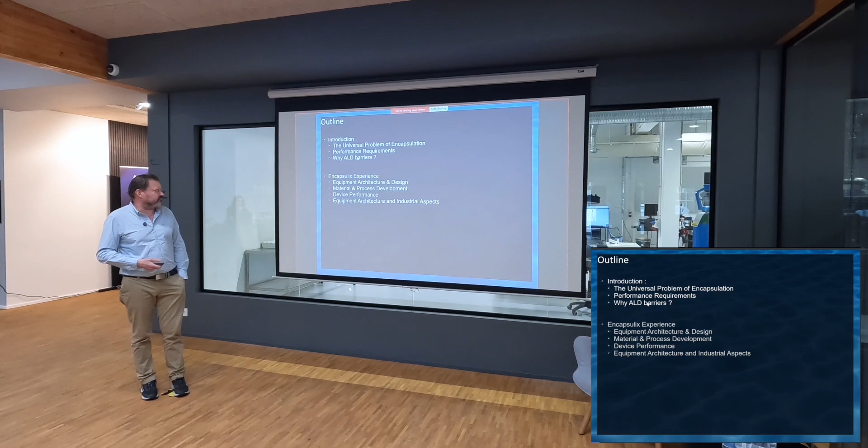Why ALD? Why we want to use ALD and not something else? And the answer to that should not be, we happen to have an ALD machine and we want to put it to good use. And then I will talk a little bit about the work we've done at Encapsulix, something about equipment architecture and design, some material and process development, how that translates to device performance to the extent that I can talk about it, and say something about equipment architecture and industrial aspects.

Okay, so as I said, when we talk about encapsulation, what do we talk about? You have devices, and devices is something to be taken in a very large sense. Products, they're fabricated, and during their lifetime, they will be exposed to chemical reactions with environmental products. And that could be as diverse as, in electronics, for example, the major thing is OLEDs. Organic light emitting devices are very sensitive for two reasons. Number one, you have these organic semiconductors, and if the molecule absorbs one water molecule, its band structure changes and it is no longer a semiconductor.

And second, if you have a display, let's say you have an OLED TV and you have 2 square millimeters that is not working, you can throw it in the garbage. If you have a photovoltaics panel and there is 0.2% that doesn't work, you could live with that. You just have a little bit less power. So OLED is a big thing. We're working with 5 different makers of OLED displays in Asia, Europe, and North America.

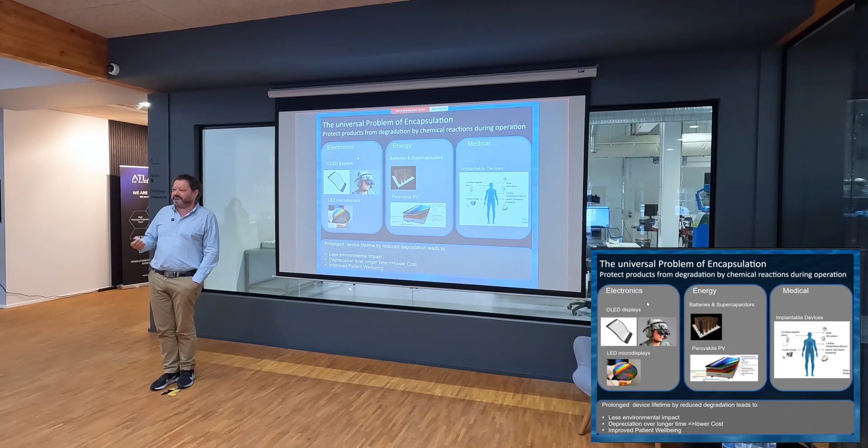And finally, if your patient has to be opened for service of the device every year or every 5 years, in terms of patient well-being, that's also highly desirable. Which brings us to: what are the barrier requirements in terms of performance? What do we want? First thing, very important, we want no pinholes, okay? And we'll come back later to discuss that subject a little bit more scientifically.

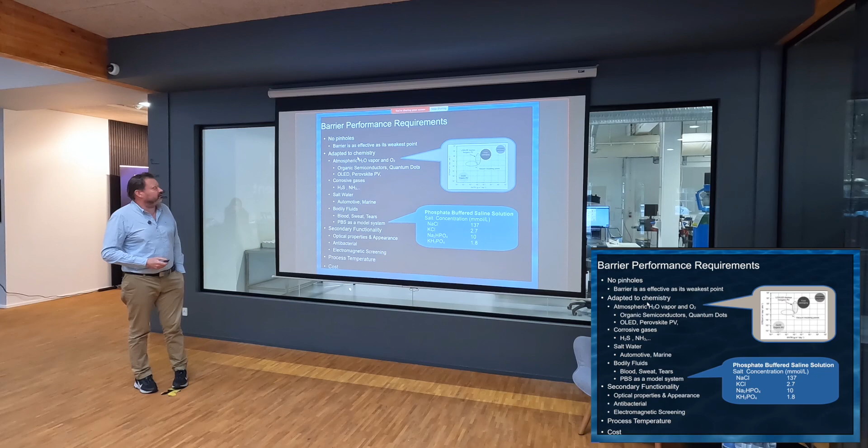And what we see in practice is that a lot of barriers are really determined by the defects. It's not so much the intrinsic properties of the material, it's the defects that determine everything. Second, it has to be adapted to the chemistry we're working with. There's a variety of relevant chemistries, depending on the application. As we talked, the organic semiconductors, the quantum dots used in OLED, perovskite, and so forth, are very sensitive to just atmospheric water vapor and oxygen.

You can have corrosive gases. For example, this is a very interesting example. When they make high-end watches, I'm talking about watches that are up to €1 million a piece, when they do the leather of the watch band, they use chemicals for this. And I've heard that there is outgassing over time of sulfur-containing components from the leather that attacks the metal of the watch. It is not my personal experience, unfortunately.

But I understand that if you buy a €500,000 watch and black spots appear after a year, you don't appreciate it too much, okay? And you have to pick up your phone and start yelling at somebody. That's part of the process.

So salt water is something that you see quite often in marine applications. Also in automotive, when they put salt on the roads, all automotive applications have to resist it. Bodily fluids: I'm a physicist, all the subtleties of chemistry or biology escape me. Essentially, bodily fluids are salt water, okay? Blood, sweat, and tears are essentially water with salt in it, a little bit of other ions and some cells. But in terms of corrosion, if something works against salt water, it usually works for bodily fluids.

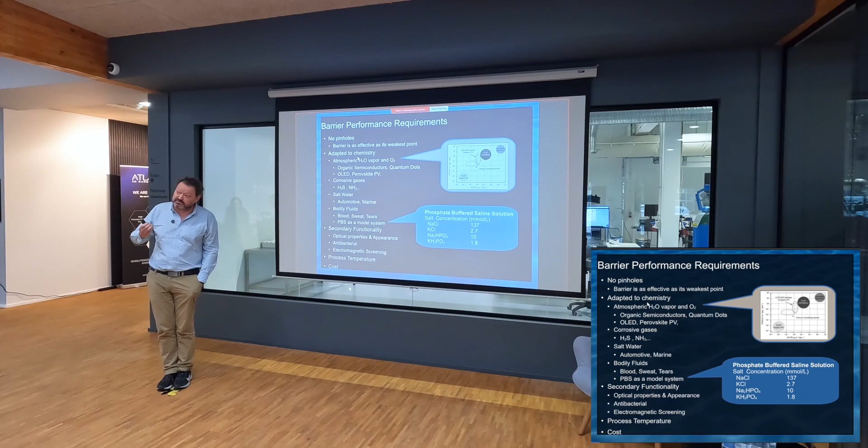And this is very well established. For example, there is something called PBS, phosphate buffered saline solution, which is essentially salt water with some KCl and some other salts that emulates bodily fluids. Or in the textile industry, you have artificial sweat, a solution that emulates transpiration, because they want paints that resist transpiration. So depending on application, you will need different chemistry, and that means we need different materials for different applications.

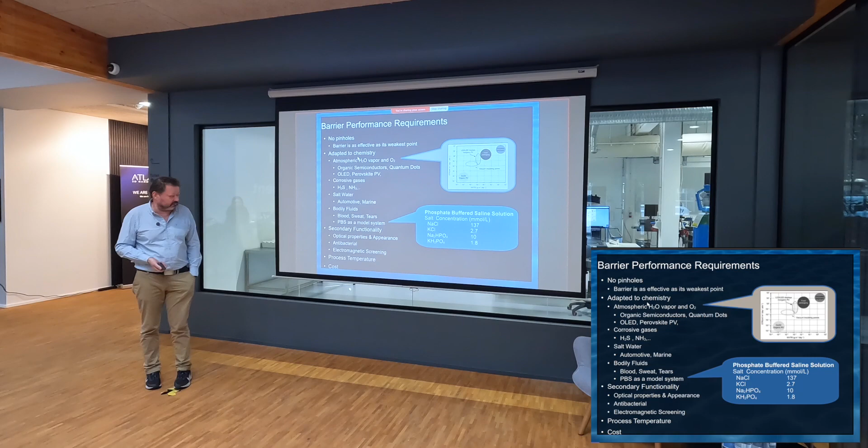And then there's secondary functionality, okay? Optical properties and appearance are important. If you have an optical device, you need transparency. You may want antibacterial properties, which is really cool, something that is auto-disinfectant. Something I think is also very cool is a multi-layer barrier that includes a transparent conductive oxide, so it is also a Faraday cage that prevents electromagnetic signals from leaking outside of the device. And then, of course, there is the process temperature.

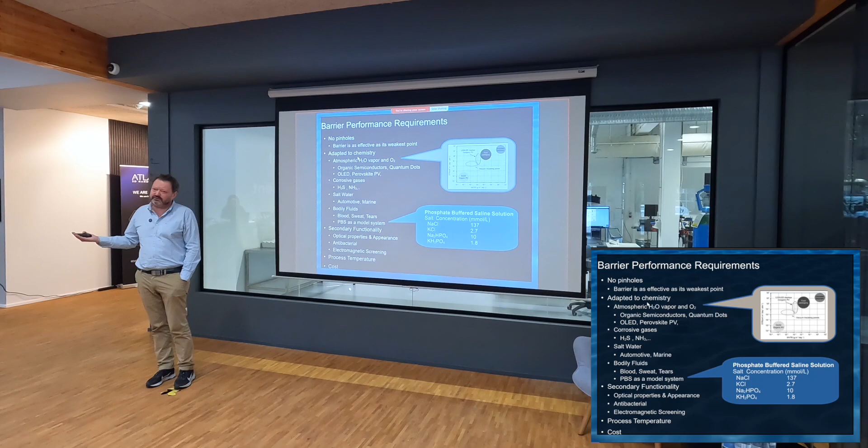For example, the organic semiconductors should not go over 100 degrees. And there is the cost. At the end of the day, that's important, and that depends on the application. On a €500,000 watch, you can be a little bit more flexible in terms of cost than on a €100 photovoltaics panel. Okay. So I will go quickly.

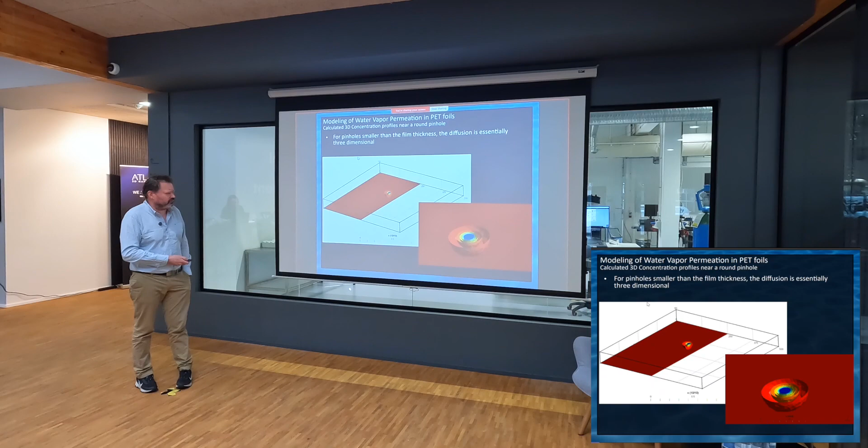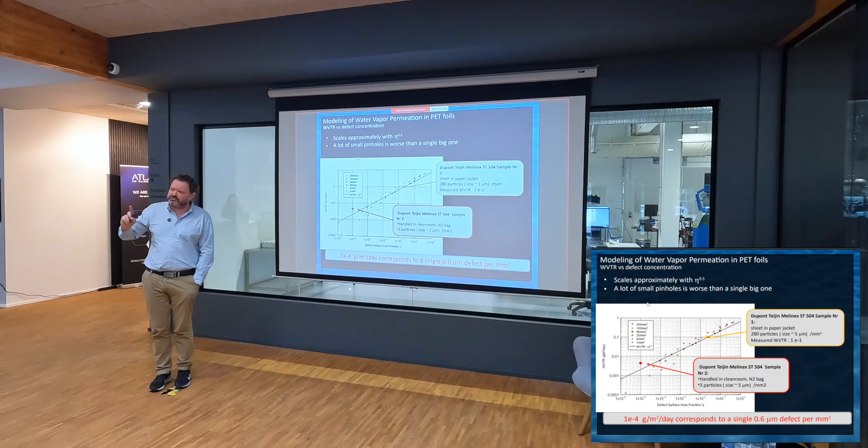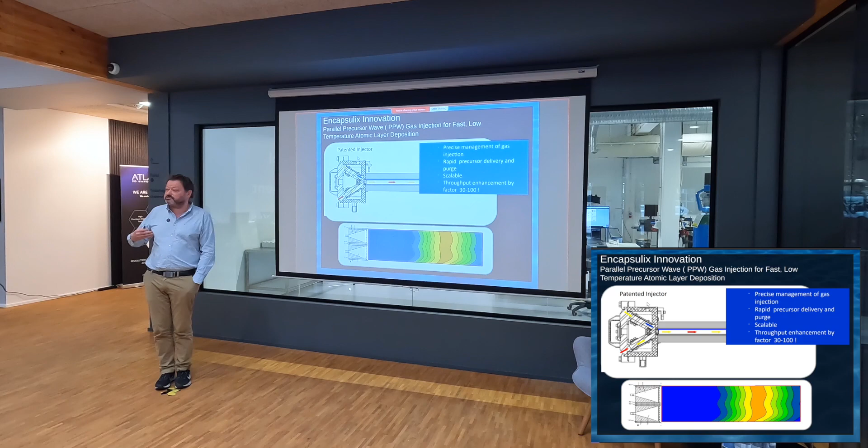So in terms of defectivity, that's a key point. You really need very low defectivity, and that is the single reason why we use ALD, because it allows much lower defectivity than alternative techniques. So at Encapsulix, we developed an architecture which we call parallel precursor wave. We used to call it tsunami until what happened in Japan, and then we stopped using that term.

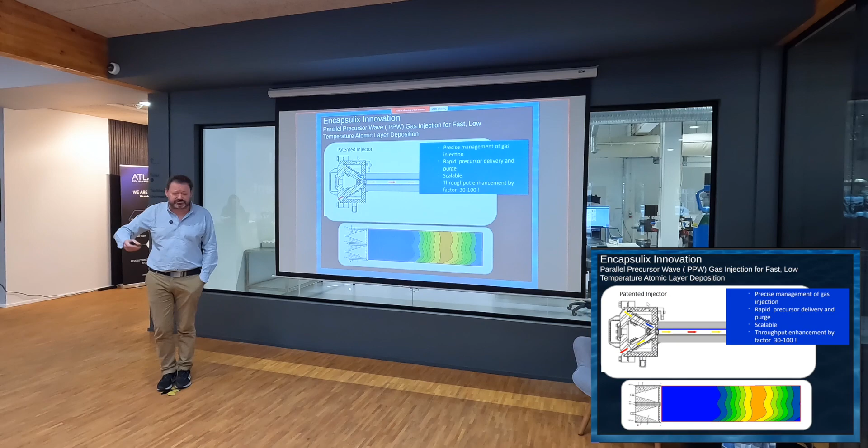And that allows us to do temporal ALD, not spatial, but much faster than traditionally. And we do that because our reactor is essentially a waveguide, where we flow composition waves of precursors through it. And that allows us to enhance the throughput by a factor of 30 to 100.

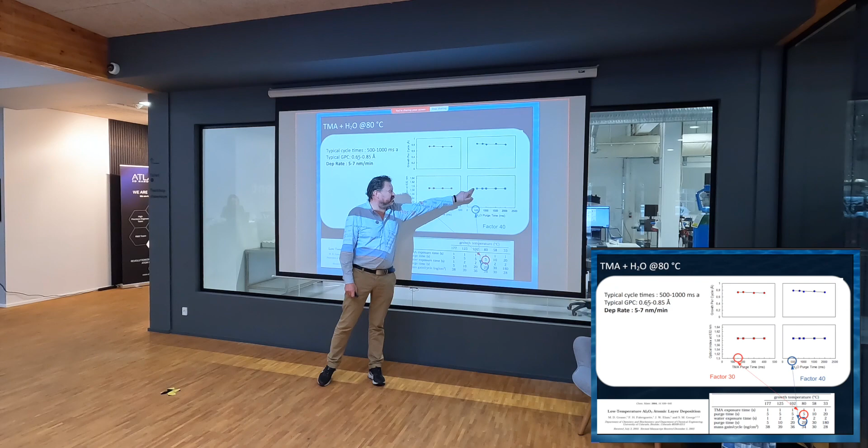For example, this is the classical example, TMA plus water vapor at 80 degrees C. You see this famous paper from Stephen George and Jeff Elam, where they have at 80 degrees C purge times of 5 and 20 seconds. And these are GPC and optical index data as a function of purge time. And you see that for TMA, we can work at 150 milliseconds, okay? 150 milliseconds, 500 milliseconds for water vapor. So we can do really 30 to 40 times faster.

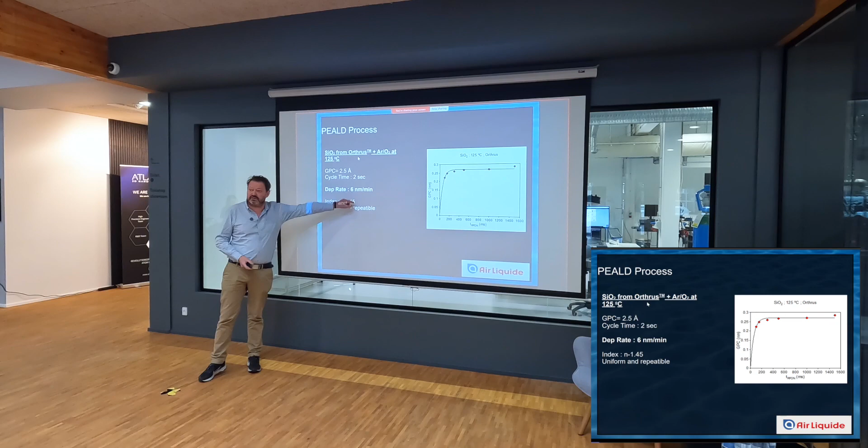And we can do PEALD also, we can do dep rates of, let's say here, 60 angstroms per minute for silicon oxide at 125 degrees. Aluminum oxide PEALD, we can do 100 angstroms per minute. So it really is orders of magnitude. It's not just that we are faster than the other methods, we still have time to drink a cup of coffee before they arrive.

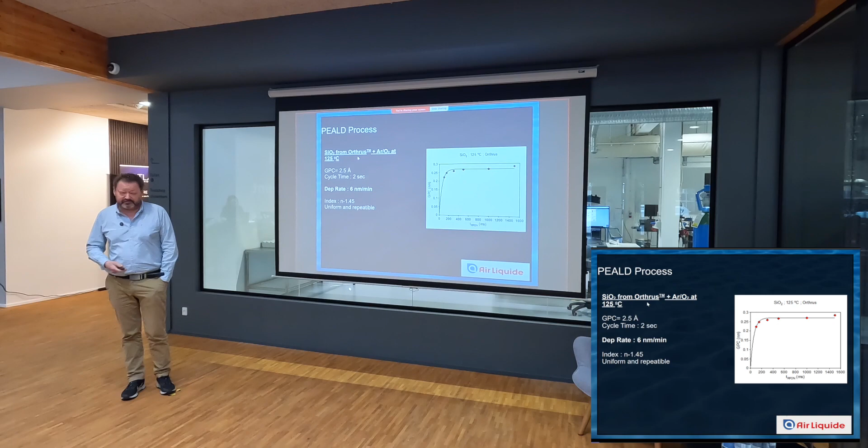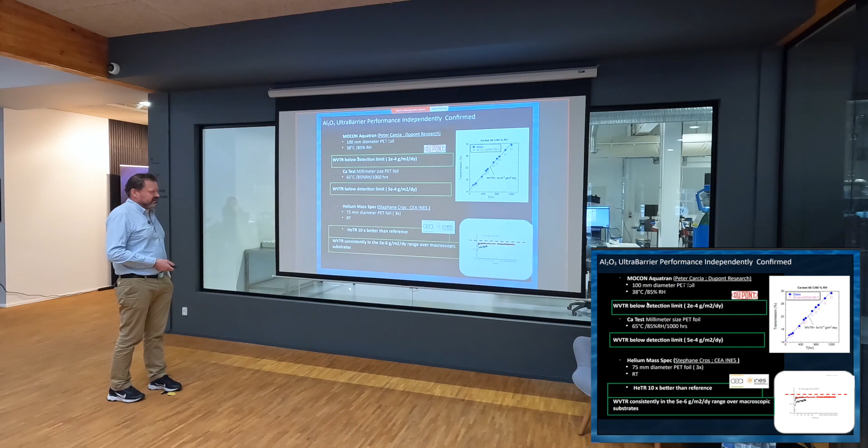Okay, and it's a good barrier. People like Peter Carcia, when he was at DuPont Research, or Stephane Cros at CEA INES have measured it, and it's a good barrier. You can make devices with it.

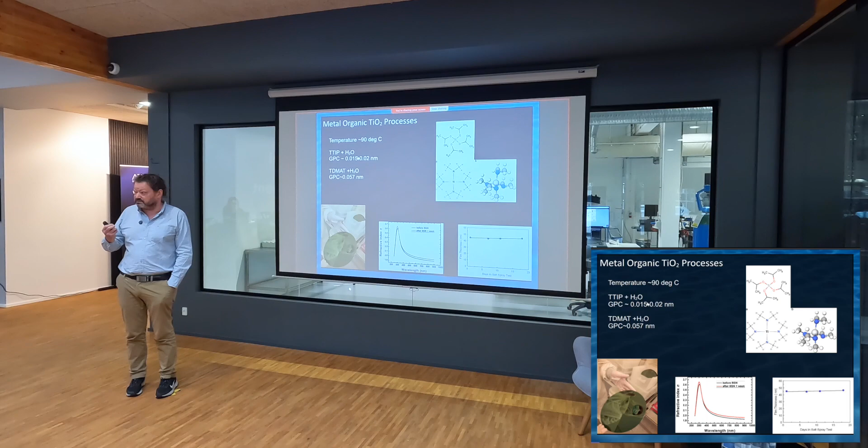Other materials, we've been working a lot on titanium oxide. And titanium oxide works very well against salt water. So these are measurements of the thickness in what is called the salt spray test. We talked about salt water a lot. So essentially, you do a vapor of salt water, a continuous jet of salt water, okay? And this is over 18 days, which is a really long time. And you see that the thickness really doesn't change. The titanium oxide comes out as a mirror. So titanium oxide is very good for salt water. Okay, so that's at the materials level.

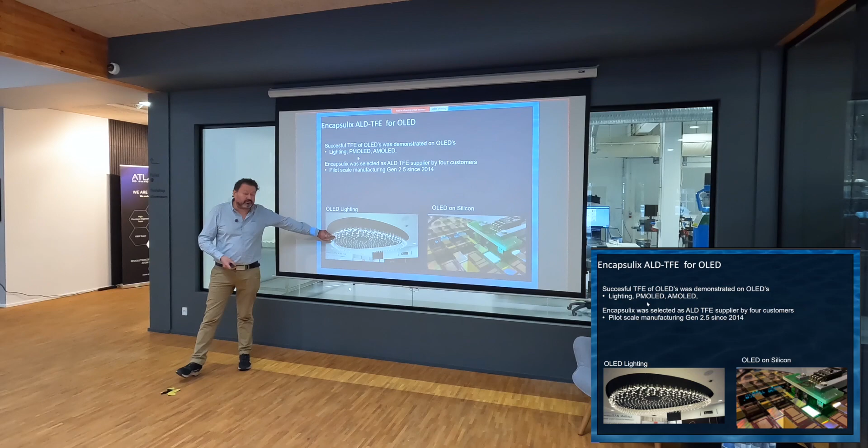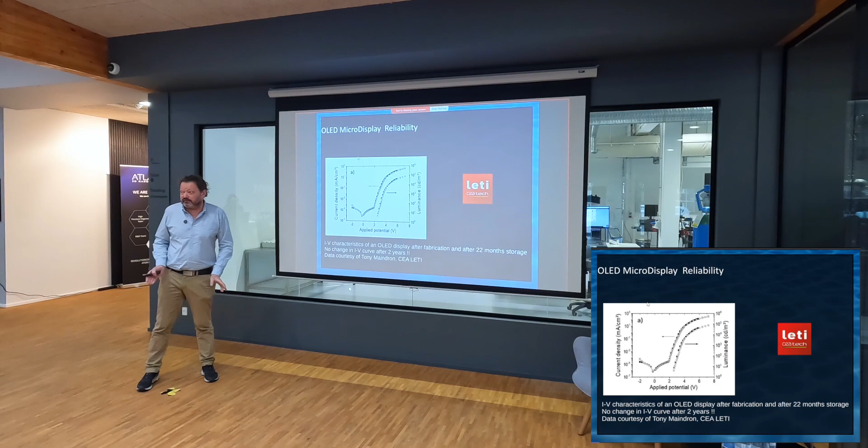Now, if we go to devices, it has been used since 2014, so for 10 years now, for OLED applications. Next time you're in Paris, if you go to Châtelet-Les Halles, which is a big train station, you see these light sculptures with OLEDs. These are made with our equipment. These are OLED small silicon transistor devices. And this is from CEA-Leti, where you see an IV curve of an OLED device as it was made and 2 years later. And as you can see, there is nothing to see. After 2 years, there is no degradation in the IV curve of the device.

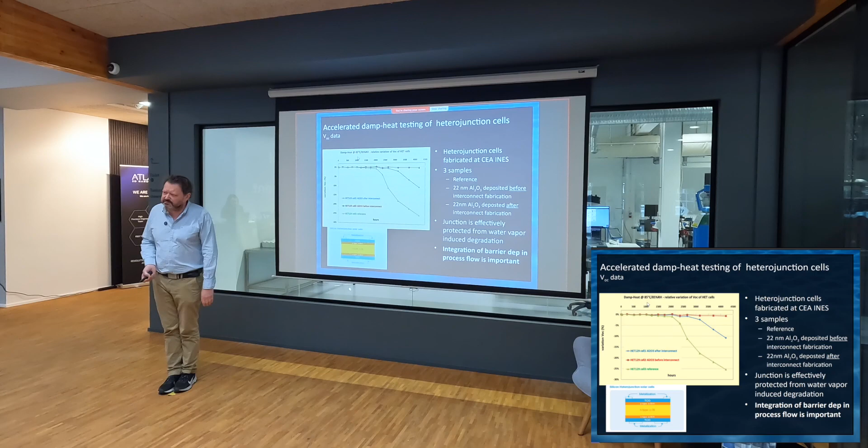This is photovoltaics, same thing, where you see the damp heat results of photovoltaics, the output voltage as a function of time. For those in the back who can't see it, this is 4,000 hours of damp heat. We had to stop the experiment because they needed the installation, but that's the equivalent of 20 years. So you double the lifetime from 10 years to 20 years. That even a politician can understand.

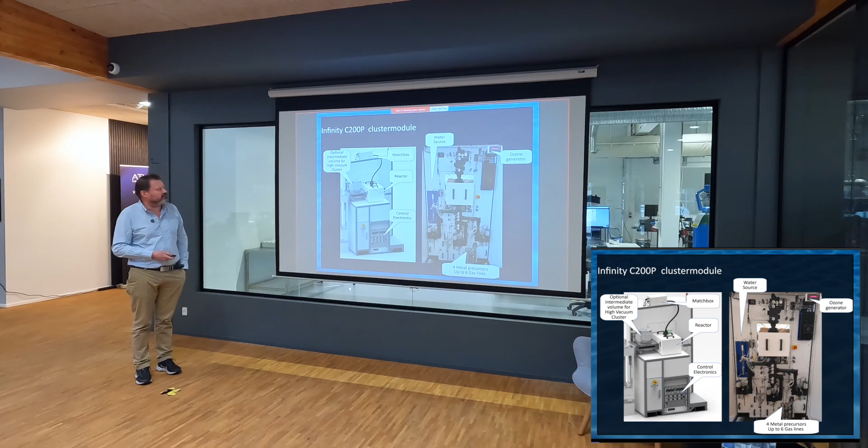So how does it translate to equipment? We've got a number of different things. This is a 200 millimeter version where we use a very modular system. So for example, our sources, these are water sources. These are different metal precursor sources, ozone generator. So this is a typical tool, 4 metals, 3 gases, water, ozone. It has plasma also. And this can be coupled to a cluster, you see.

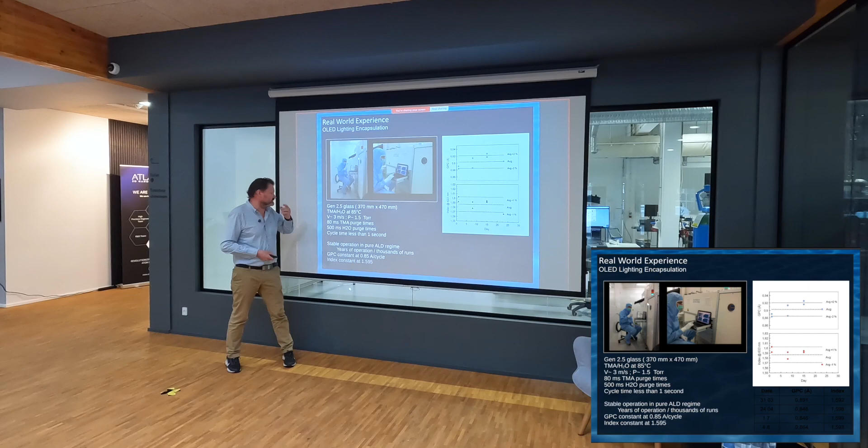This is a larger tool for large glass panels, 500 by 400. This has been used on large substrates, 370 by 470 millimeters, at ALD cycle times less than 1 second at 85 degrees, where it was really thousands of depositions a year. And you see here some stability over a month. It's essentially plus or minus 1% variation over 1 month of operation.

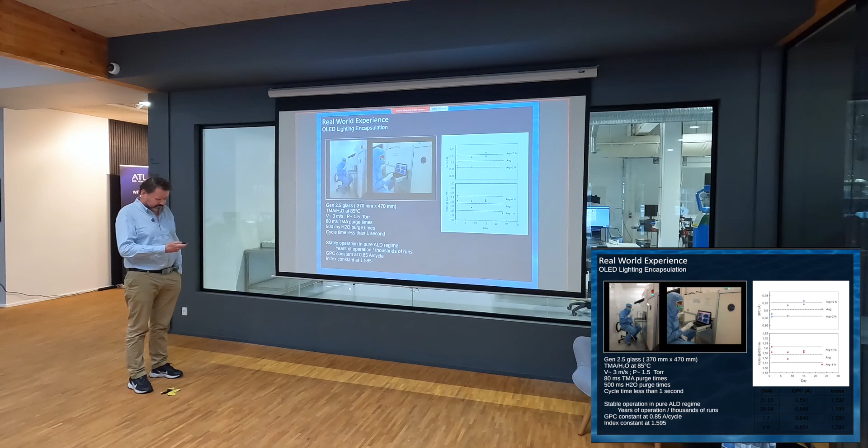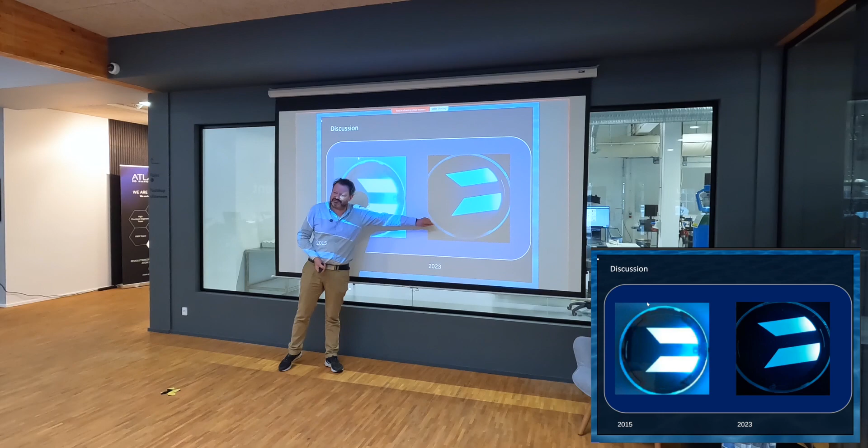Okay, and before I go to the discussion, this is one of our customers who made an OLED with our logo. And this is the OLED in 2015. This is the same OLED when I cleaned up my office in 2023. So you know how often I clean up my office. And you see that it still works nicely, with no black spots.

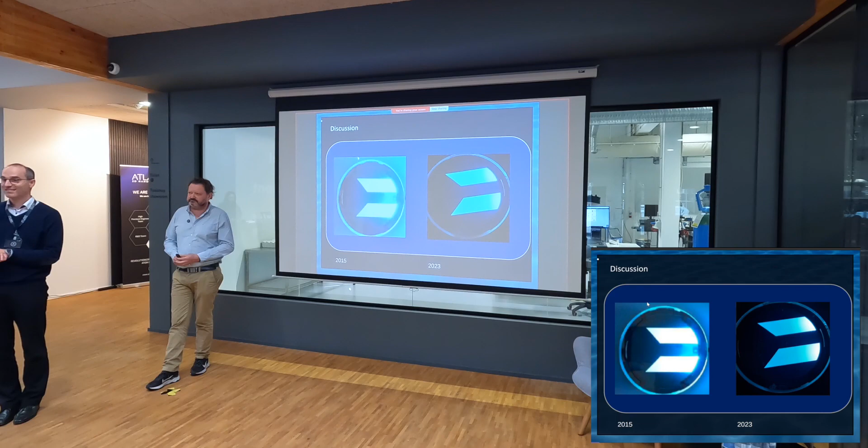What were the thicknesses when you were doing the encapsulation? Well, the thickness depends, but for example, this is 500 cycles ALD. 500 cycles of aluminum oxide, so it's about 43 nanometers.

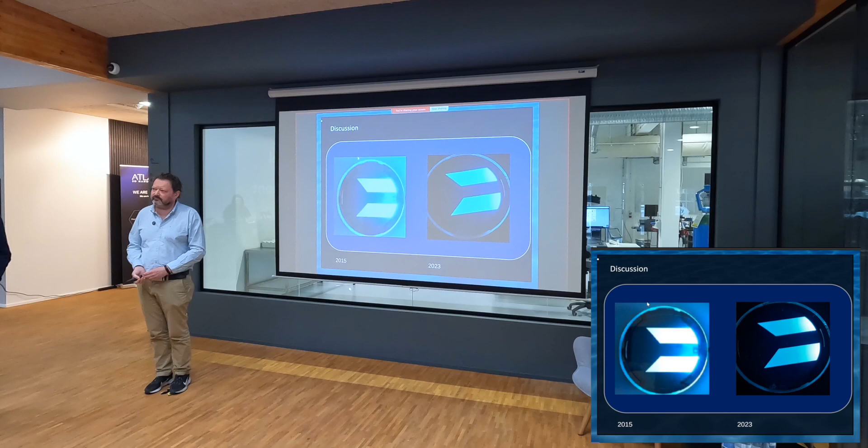The back? You are talking about quality after the measurement. I wasn't there, so I can't tell you. They didn't tell us exactly what they did. But I understand that it has been, you know.